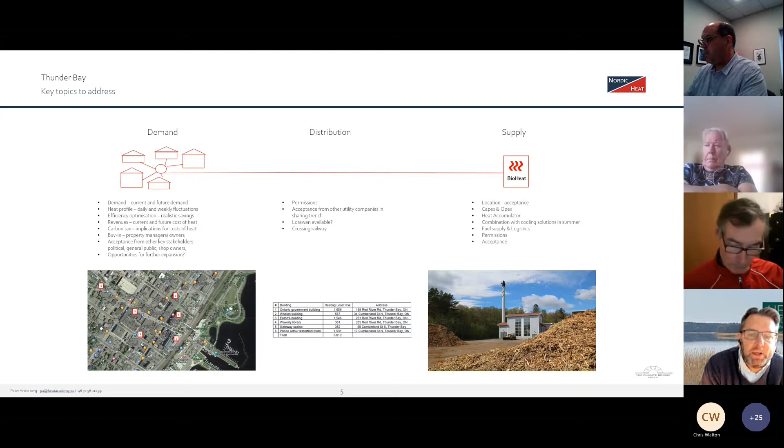Now the project we're going to focus on today is a bit more limited, obviously, at the current stage. We are looking together with Kevin and the team at how can we make this possible to connect a number of buildings in downtown Thunder Bay to a heat network, which is supplied from a biomass based heat unit somewhere in the proximity of downtown Thunder Bay. So that's the objective, to find, can this be done in an affordable way, and if so, how?

And this is what we bring in, the experience from Nordic Heat. I will not dwell too long on these slides, but what we try to do is help bring in the experience, the know-how we have developed, and our partners have developed in other regions, thereby giving the project in Thunder Bay a faster move through the process of developing and implementing the network. So we work with...

...companies and councils, primarily councils across Europe, and also, which we don't see in this slide, also in Asia. The training side, as I mentioned, what we try to do here is always to build up local partnerships, and we can come back to that in the next session when we are presenting what we have come up with in the pre-feasibility.

So what we're going to try to do today is take you very quickly through the first four steps in a journey on how you decarbonize heating with district heating, with heat networks. What's possible? Why are heat networks a very good idea to put in place?

It is not only about heat, but as you will hear, it's also about socioeconomic opportunities for the community. We will also touch upon what heat networks really are and where they are best located, what are the best locations to actually implement them.

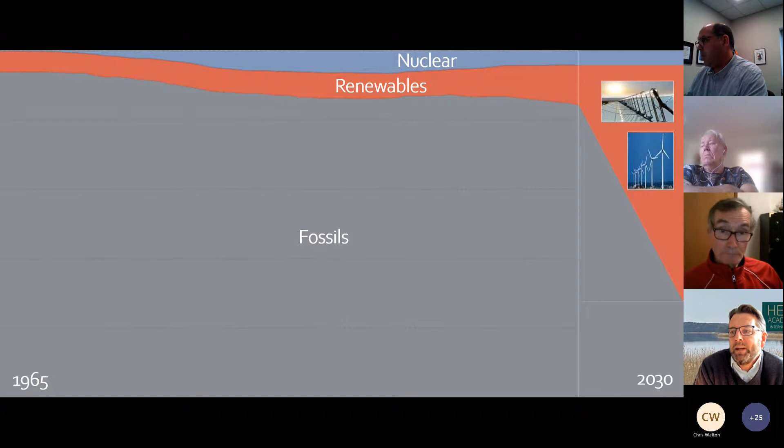This is another way of saying the same thing. Some 80% of all energy, primary energy input to our economies globally, has come from fossil fuels. Even if we look back to 1965, it hasn't changed very much. Considering the climate change agenda, we basically need to cut down massively, perhaps up to 60-70%, the dependency on fossil fuels just in the next 8-9 years. And to replace all that fossil fuel with wind and solar, I think nobody believes that will become possible.

So we need to find another way of addressing this. Parallel to that, we implement these kinds of sustainable energy solutions. But just doing wind and solar will not make it, particularly considering that we expect a doubling of the demand for primary energy in the next 15 years. So we have a big challenge ahead.

And we are faced with kind of a devil's alternative. If we don't provide energy to our economy in terms of fossil fuels, we're going to have social unrest. We've seen quite a lot of that in Europe in recent years, not only linked to the pandemic, but also linked to companies laying off people. Traditional industries have to close down. But unless we address the climate, we will have even bigger fires, which we've seen as well. So it is a really big dilemma.

The question is, what can we do and where do we start? Then we need to look at the topic of district energy. It's not a silver bullet. It's not something where you implement district energy and then everything is resolved. But it has a very big impact on the problem, and should definitely be one of the areas to prioritize in the coming years.

The explanation to this is that if we look at the total primary energy consumption in an economy like Canada, but similarly in the UK or Belgium, some 40% of the primary energy we put in, and most of that is fossil fuels, 40% of that is to heat buildings. We don't often think in those terms. We talk about cars, we talk about airplanes and so on, but a big chunk of the energy we consume is actually to heat our homes, at least in the regions where we live, in Canada and in Sweden, in the northern parts of the world.

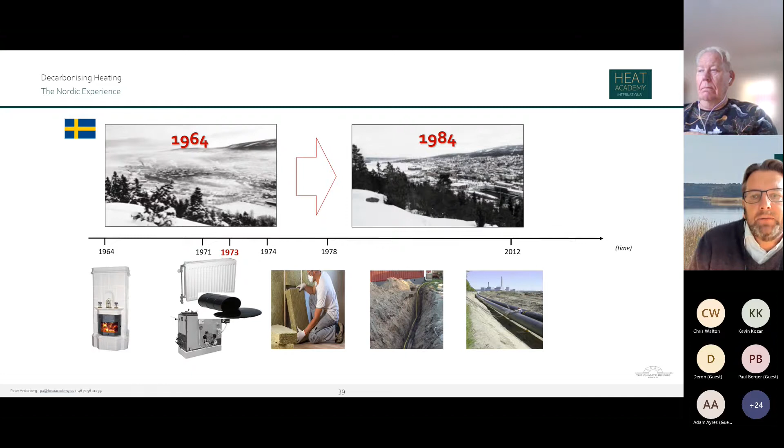For instance, in Chile, this is a big issue, to get rid of individual fireplaces and thereby get rid of smog. Today, the home where I lived is connected to a huge regional heat network.

Today, they sell the waste heat to this district heating grid, and that has enabled them to make enough money to actually maintain production. That gives them a competitive advantage to maintain production in Sweden.

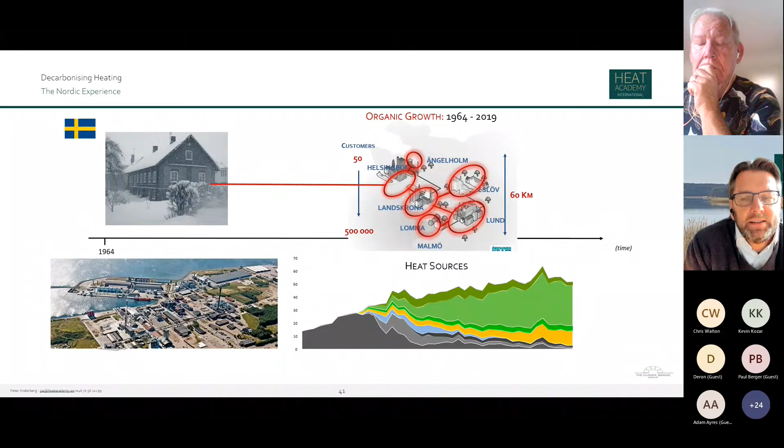Thanks. So in Sweden, from the early days of small-scale heat networks, we had a big drive through the oil crisis in the 70s, and today we've reached a market share of approximately 55% of all heat provided in Sweden. It comes through heat networks.

Now, I assure you, we are not looking at building something of this scale in Thunder Bay, at least not in the feasibility study we are looking at now. But the principle is the same, to make use of waste wood from the forest industry, and I understand you have a big forest industry in the Thunder Bay area, just as we have in Sweden. It's not about cutting down forest, it's about making sure we can utilize waste material from forestry.

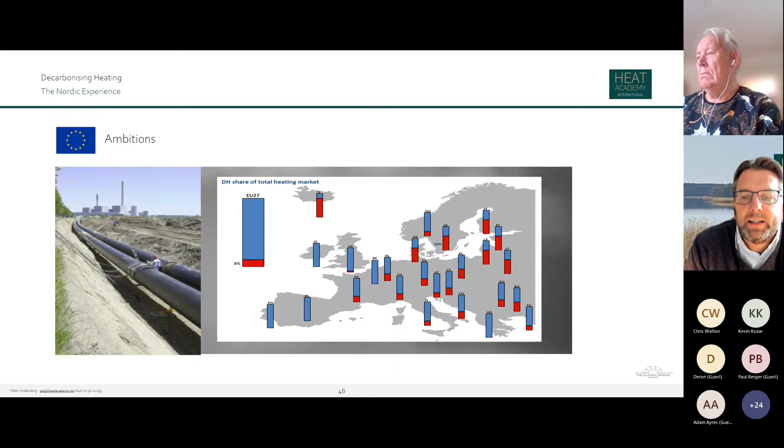The problem they have is that they have very inefficient systems, so they need to replace the pipes, which are leaking quite heavily. But we see a very strong trend across Europe now to rapidly expand district heating, enabling a quicker transition from gas to alternative heat sources like industrial waste heat, biomass, and similar.

If we look at the UK, they have set a very aggressive target to take district energy from the current 2% market share to 20% in the next 20-25 years or so, which is a very tough target to reach.

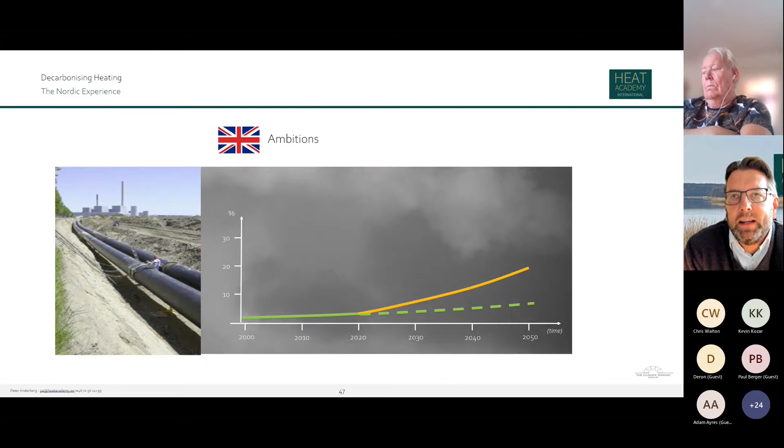I used to be selling pipes like the ones you see on the left-hand side. In the UK, to take district heating to 20% market share represents some 25 million 12-meter long pipes. Not all of them of this dimension, but it's quite an important number of pipes. And it's not just the pipes, we need to excavate and get them down into the ground. That will be a significant task as we move into the future.

I'll stop here now and hand over to you, Michael, to take it from here. Thank you very much, Peter.

My name is Michael Jacobson and I'm part of Peter's team. I started out in the business some 20 years ago, responsible for the design and operation optimization of Stockholm's district heating and district cooling system. For the past almost 15 years, I've been located in Asia, mainly carrying out projects in China and surrounding countries like Mongolia, Kazakhstan, Uzbekistan, developing and optimizing some 70 district energy projects.

I will try to share my screen and give an introduction to the concept of district heating.

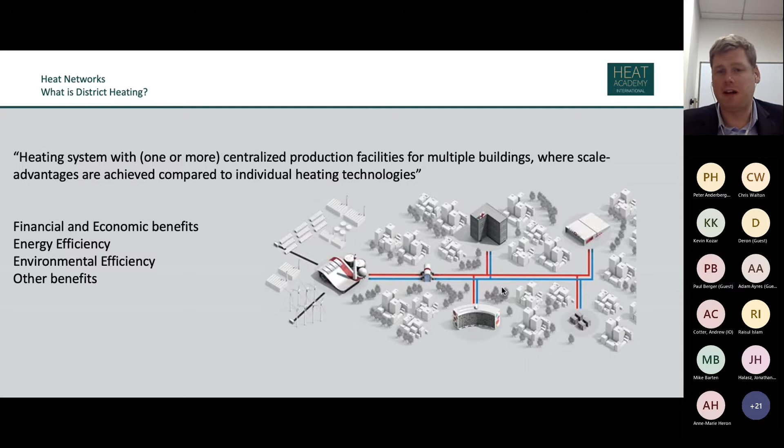If we look at the development of the district heating sector, it started out more than 100 years ago. At that time, there was mainly steam systems with very high temperature and quite low efficiency. As time has passed by, the development trend has been that we are reducing the temperature level in the district heating system, and we are increasing the level of integration of different kinds of heat sources, but also integration to other energy systems.

Nowadays, it's very common to integrate the heating network with the electricity grid, with cogeneration plants and so on, but also to integrate with cooling systems, often distributed because they are, per definition, smaller scale. We're utilizing a lot of waste heat, and that is possible to do as we have lowered the temperature level in the systems. So the typical trend has been that we are lowering the temperature, utilizing local resources, and it is a multi-energy system. That has been the typical trend.

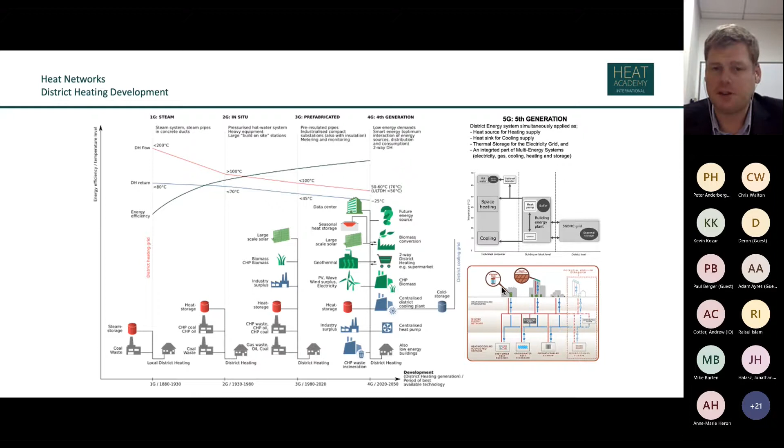We often talk about smart district heating nowadays, and what do we mean by that? Because often we start to think about intelligence, we think about data and IoT and these kinds of things, typically IT-based tools.

However, when we talk about smart district heating, we think about a number of characteristics that we should achieve. So we want the district heating system to be flexible. By flexible, we mean both in terms of being flexible for demand changes on a daily or hourly basis, but also flexible when it comes to development over time.

Then obviously also in regards to intelligence, to utilize smart IT tools for optimization, but also innovative engineering solutions. Integration, as I mentioned, integration to other energy systems and utilization of local resources. Efficiency, of course, and one of the very important things to be able to call something smart is that it is competitive.

Even though we can say district heating nerds, we think it's very important to develop district heating schemes in a way that is feasible. We should not develop district heating systems where it is not competitive and where it does not make sense. So it's not a solution for everywhere, and the size can very much vary depending on the local conditions.

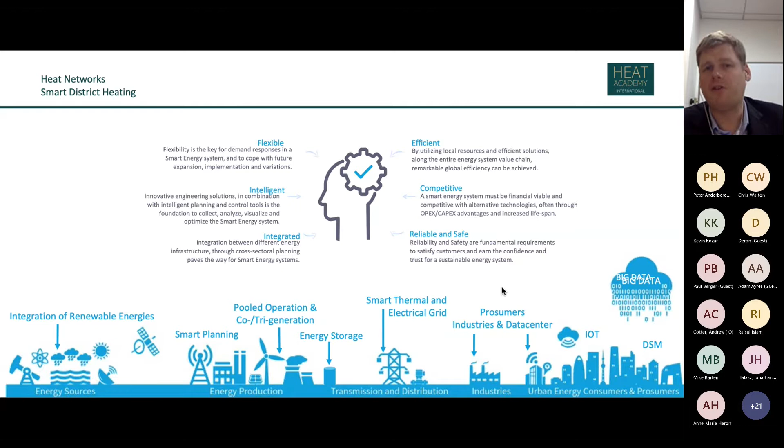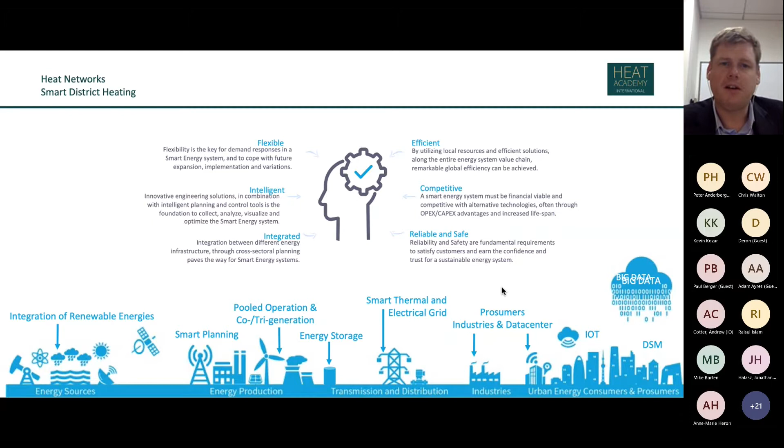It's very important to keep this in mind, because if we are not fulfilling this throughout the whole chain, we cannot achieve a good result in the end.

With this, it's very important to start with heat planning, or feasibility studies. We often talk about doing scenario analysis, where we always take departure from what kind of demand we have, and look into what different available resources there are. Like Peter said before, in Stockholm about 15% of the heat is based on heat from the sewage water system, using heat pumps to utilize the waste heat. There are a lot of different heat sources available in the city, and I will show more later.

The key to succeed with the development of a district heating system is what we call heating demand density. It tells us what the heat load is in a certain area, because that decides whether it is financially feasible to develop the district heating network especially. So heat demand density is very important to find out the feasibility of a district heating system, and we look into different scenarios, finally doing technical, financial, environmental, and institutional benefit analysis.

The design is important as well. We have to remember that a district heating system is a system, not just a technology. It is dynamic, large scale, and there are delays in the system and certain dynamics. I will come back to that later.

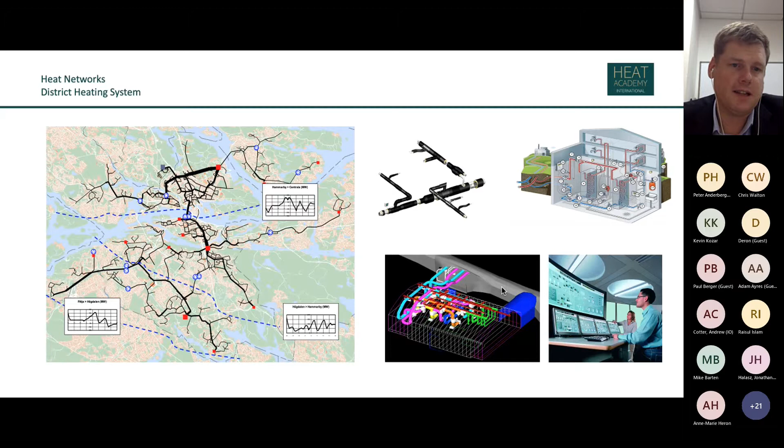We have a supply pipe that supplies the hot water. The heat is transferred into the building, and then the cooled water is recirculated back to the production facility and heated up again. So it's a closed system, where in a system like Stockholm, the water leakages are extremely minor.

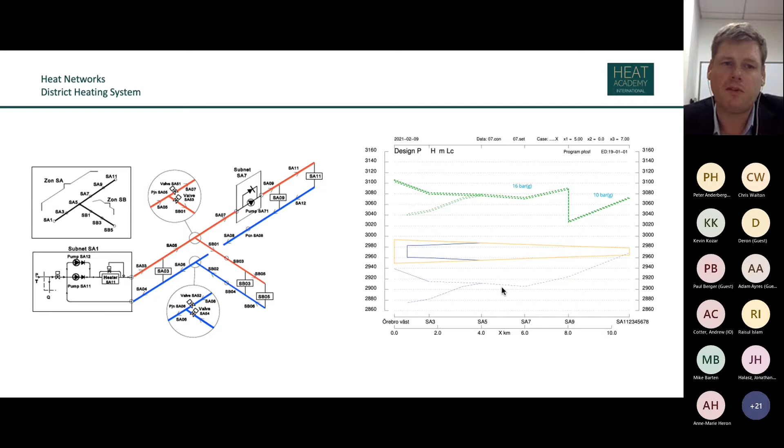The level of water losses is less than half of the total volume in the network per year. It is very, very little leakage, and 90% of these leakages are because of maintenance work, on purpose tapping out water from the system. Again, that comes back to the reliability and safety of these kinds of systems, and that there are professional companies responsible for operation and maintenance.

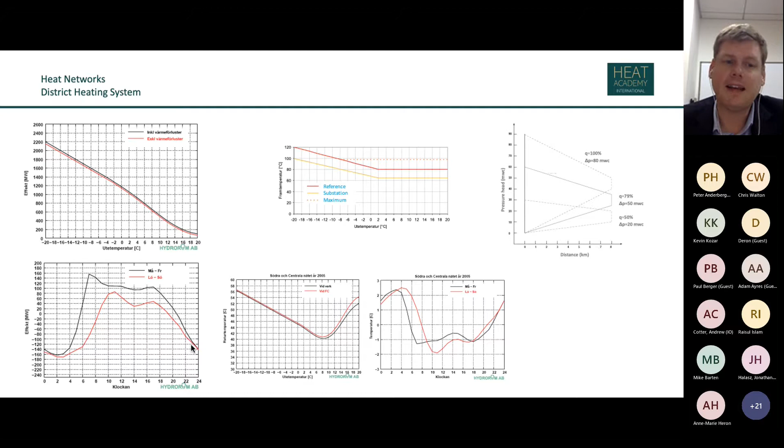So what is influencing the heat load in the district heating system? The outdoor temperature, obviously, but also wind and solar radiation, and also internal appliances. All this is influencing the heating demand.

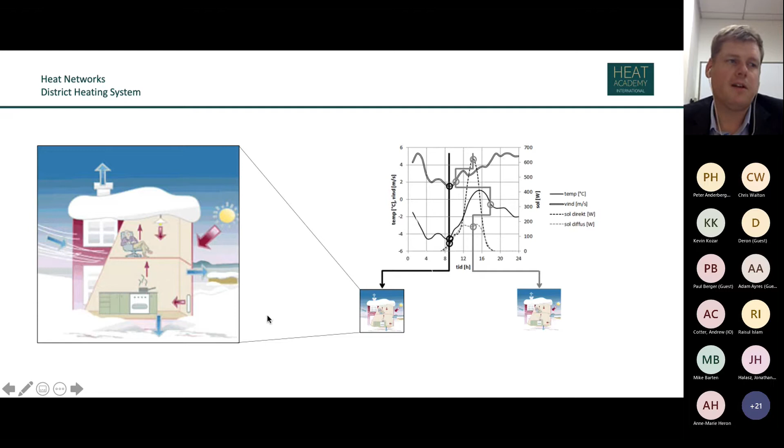Traditionally, it has been common to look at a certain time, what is the temperature right now, what is the strength of the wind, and what is the solar radiation, and then control the heat supply based on that. However, due to the thermal mass in buildings, these different factors have different impact over time. So nowadays there are IT tools to help predict what the heat load will be in the future, resulting in an even more efficient energy system.

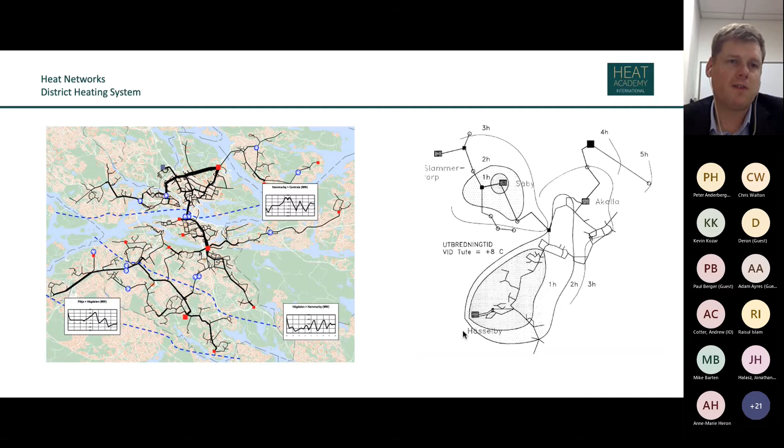As I mentioned, it is a system, and this is part of the Stockholm system. As we can see here, this illustrates how long it takes for the water to go out in the system. That's why we have to be prepared already hours before the specific demand is required. However, there are great tools to achieve this with very high accuracy today, so the control of district heating is not really a challenge anymore.

Some examples of heat recovery: I mentioned the sewage water heat recovery in Stockholm. It's also possible to recover heat from data centers, from industrial processes, and from other water sources such as sea, lake, or rivers, and together with heat pumps supply heat to the district heating system.

In Stockholm, I think there are about 15 data centers that are feeding their surplus heat into the district heating system.

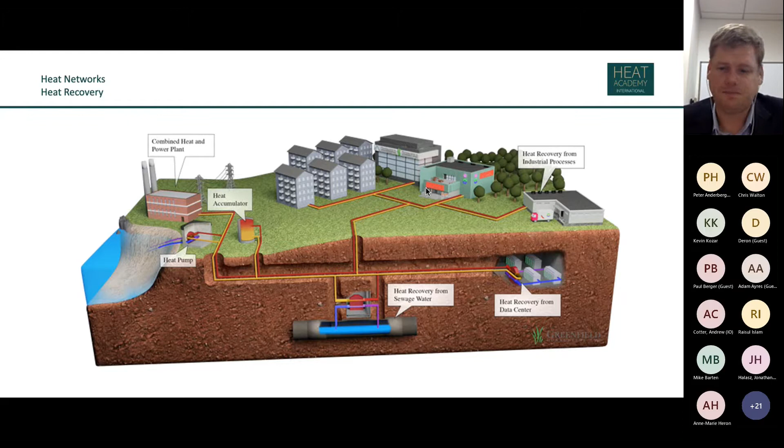It can go even further, where heat is recovered from supermarkets, for example from refrigerators and things like that. It's also common for swimming pools to be heated by the district heating system, and some consumers have their own production facility as well. So sometimes they are consuming heat and sometimes they are producing heat and selling it back to the district heating system. So this is again about the integration in the district heating system that is of great importance.

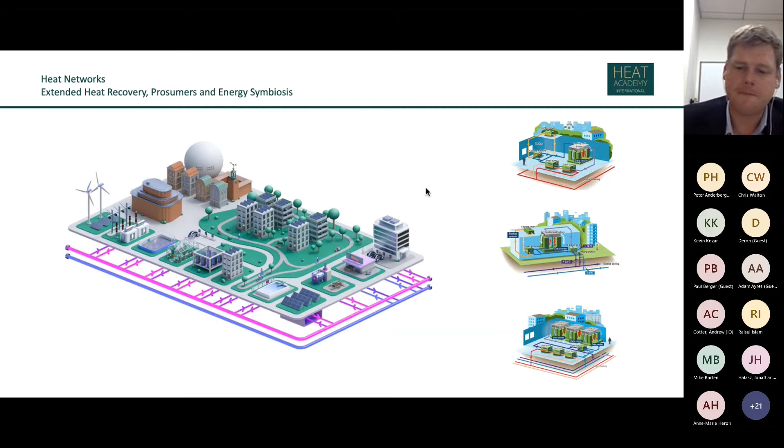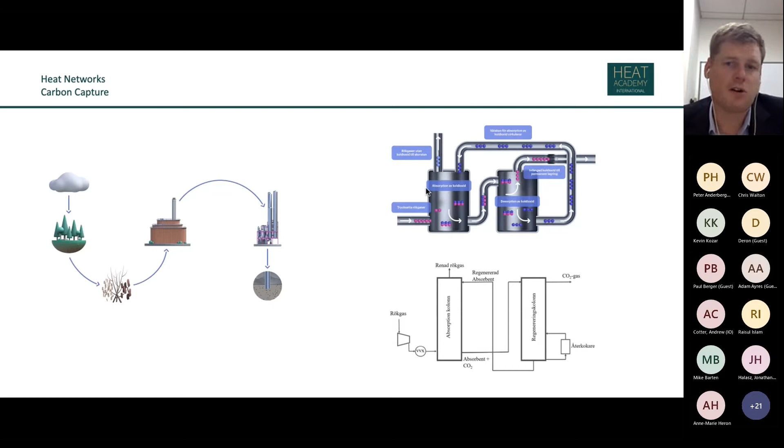There is also opportunity for carbon capture, and since there is quite a lot of biofuels and biomass in many Nordic systems, it's possible to achieve not only carbon neutral but even carbon negative or climate positive outcomes through carbon capture technologies. This has been researched for the past five years or so, with great attempts, and now it's getting commercialized in countries like Sweden, but also Germany and others have quite mature technologies when it comes to carbon capture. It's quite interesting to look into.

Thermal energy storage is another technology, and in coming sessions we will talk more about the opportunities with it. This is simply to store heat when it is available and use it at a later time. This can be on a daily or weekly basis, but also over seasons - if we have heat at some point, we can store it for even months and then use it later. There are different technologies when it comes to thermal energy storage.

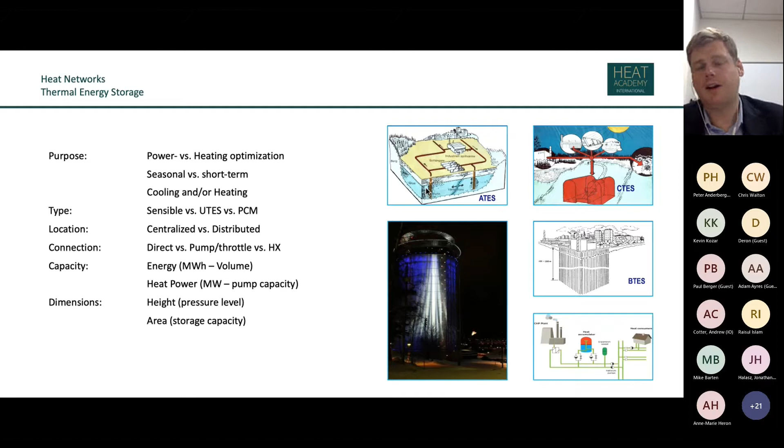I think I will jump here, it gets quite detailed. So again, the design and the planning is of great importance to get right from the beginning, and also to be able to reach the level of financial feasibility. There is no doubt that bigger is not necessarily better - it's very important to look into the local conditions and develop the system accordingly. Like I mentioned, I personally worked with close to 100 district heating and cooling systems around the world, and I would say all of them are unique.

There is a lot of experience to take advantage of when developing a new district heating system, but however, each and every system is unique, and it's very important to look into the local conditions. This comes both to the demand - how much demand there is and what kind of demand it is - but also what resources are available, and so on. If you remember, in the beginning we talked about the first, second, third, fourth, and fifth generations of district heating. It's not possible to say that the fourth generation is necessarily more suitable than the third - it's not always like that. It totally depends on local conditions, and based on that, district heating systems typically have characteristics from a number of these different generations.

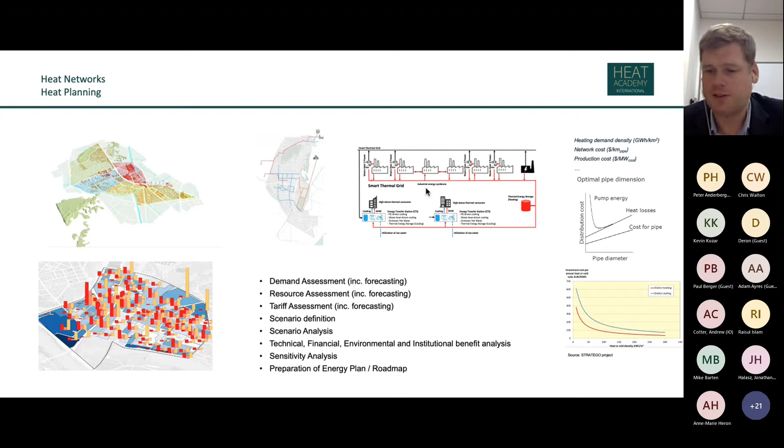Obviously, the goal is always to have as low a temperature level as possible, to reduce heat losses and achieve higher efficiency. When it comes to the cost of district heating, there has been a lot of research done over the years. What has been focused on in the past is ensuring that district heating systems are financially feasible even for low energy buildings, because as we move on - and this is the case in the Nordic countries as well - it's not only that it gets warmer due to climate change, but actually consumers are carrying out energy efficiency measures.

Even though the networks are expanding, the total heat load might be reduced, which means that the heat density, which is of great importance, is getting reduced. That's why we have to make sure that district heating systems are financially feasible even for relatively low energy demands. That is of great importance.

This has also been a driver for later generations of district heating, because when we lower the temperatures to a certain level, we can start to utilize new technologies like plastic pipes and other technologies that make the investment and implementation cost lower than it has been traditionally. With these evaluations carried out, it has been proven that district heating definitely is financially feasible as long as it's developed in the right way.

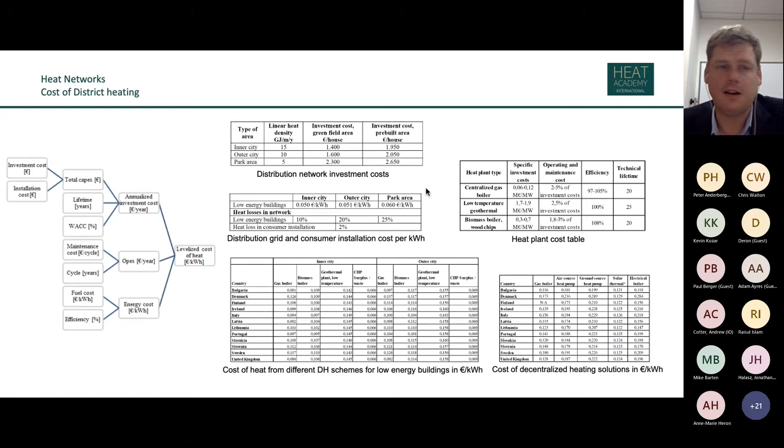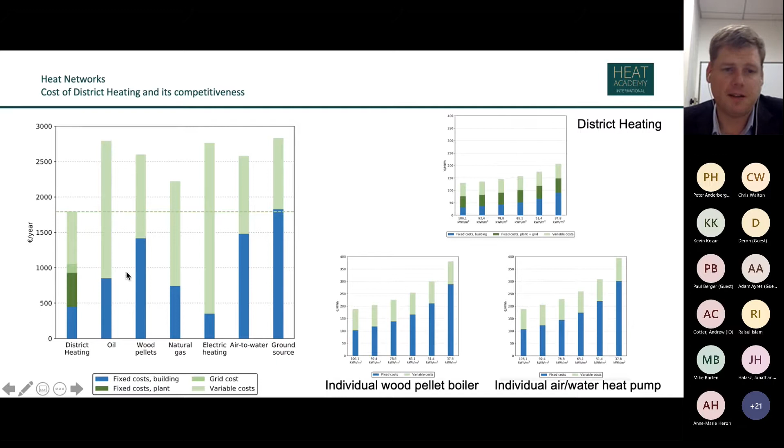With that, I think the last one is about the tariffs. I think it's of great importance that the tariffs are designed so that they stimulate energy efficiency measures. Nowadays, the tariffs often comprise several parts - one part related to consumption, which is something the consumers can impact. If they use less energy, they will also pay less.

Then there is one component related to capacity, which is something they could also influence. But also a component about efficiency directly, which is often applied so that the ones who are most efficient will get a reduced heating bill, while the ones who are less efficient will get a penalty charge. This is to stimulate energy efficiency measures on the consumer side.

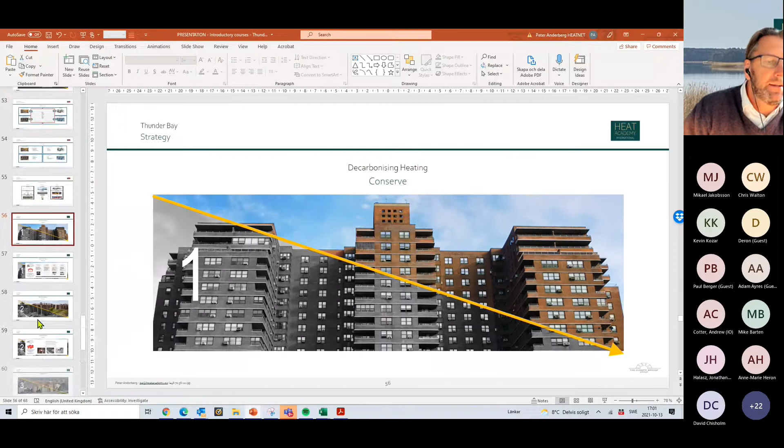I've got a slide for describing just that, which I used as the final slide before. It is that size matters here. If you have only one house, you're fairly restricted in the options for heating it — basically heat pumps or a gas or oil boiler.

But as soon as we look at combining a number of buildings, like is the case for the feasibility study in Thunder Bay, that gives us a bit more options. We could have a combined bioheat solution, or a combined gas CHP. Having it combined reduces the cost of operating it, but it also helps reduce pollution levels.

If we centralize the biomass burner, we can invest in very advanced filtering systems, reducing pollution levels to close to zero. Whereas if you have an open fireplace in your home, you can't do that, obviously. And once you get really big, we can look at other solutions as well.

But I think what we're looking at in this case right now is the buildings — what can be done to them, and how do we connect these buildings. The more we can reduce the demand for heat, the more we can reduce the size of the pipe we put in the ground, thereby reducing the capex and improving the financial viability of the project.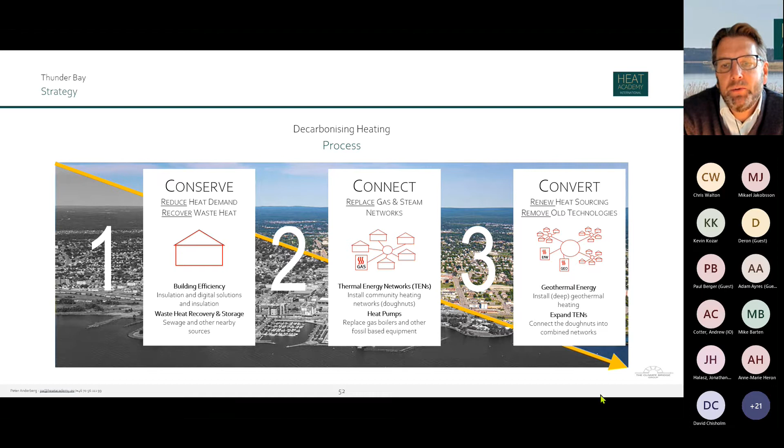I like also to comment on what does it mean to conserve buildings? Well, that's an interesting area also for us who have been in this sector for many years. The traditional way, and what we did back in the 70s, what we often have done, would have been to change windows to fabric and so on. And had you asked me 5-6 years ago, I would have said this is what we should do immediately.

However, with digital solutions now coming into our industry in a very quick way, and we see it spreading all across Europe now and beyond, also in the industry of heating buildings, there is a big saving potential to be done in a much more cost-effective way by implementing sensors in the buildings, connecting these sensors through wireless connections to kind of an artificial intelligence solution that in turn is connected to various other data sources like weather forecasts, etc.

The idea behind this is that the machine learning system learns how the building operates, but it also learns that if we have sunshine tomorrow, then we should turn off the heat system today, because there is this delay in getting the temperatures down.

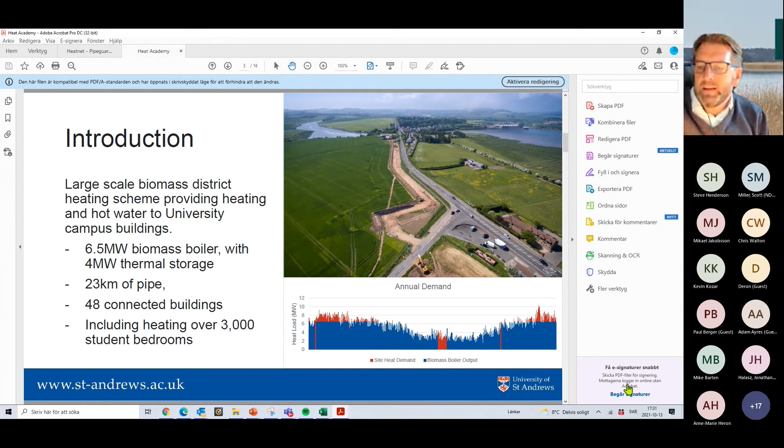This is in Scotland, in the UK, University of St Andrews, and they have actually recently commissioned a fairly large-scale biomass district heating scheme, similar in size, at least in terms of heat capacity, to what we are now looking at in Thunder Bay. A longer stretch of pipeline, but the same method of using biomass to produce heat, with a similar number and style of buildings. So we will involve them in one of the upcoming sessions to share their experiences starting from scratch, using gas as the main source of heat. Often this is what we try to do, bring stakeholders together to share recent experiences. So I just wanted to highlight that they will be joining us in an upcoming session.

Kevin, would you have any comments on what we have been talking about?

No other comments, other than the fact that in the Thunder Bay study we have identified some potential buildings, and we've done some heat loading calculations on these buildings, and we feel there is a case to proceed with the study and make sure we can do it in a feasible way. We have a really good opportunity in Thunder Bay with this system, in that the city is going to be doing some road work in the downtown north core, which would allow us, if the timing is right, to utilize that roadwork period to put the heat pipes in the ground, at least some of them, minimizing impact to the overall project cost. Those are details that have to be worked out, but that's one of the driving factors of the whole project. There's a lot of details not yet worked out because this is a pre-feasibility study, and at this time it's just to decide whether to proceed with further study and design, or to know there's no economic payback and it doesn't make financial sense to proceed. So it's a very high level study at this point, but we have some really good opportunities to ensure cost savings on the project.